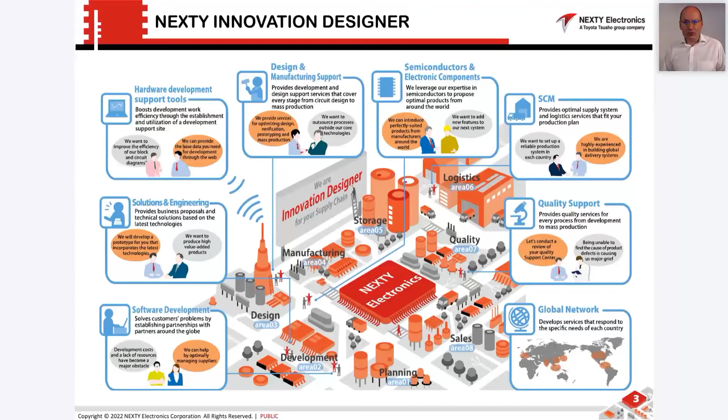And I'm a little bit of a lucky guy, because I can cherry pick a little bit what is really cool, what is very hot, and sometimes what is not hot now but could become very hot in the future. And I'm very carefully taking care not only about the technology, but as well about the business model behind it, because it needs to be sustainable, as all our company's contribution is to the world. We are looking for the long run.

Now, only a short view of our semiconductor products. So I don't want to sell you anything out of that. We are basically very, very strong with our group companies. We are keeping a very, very good stock of them and keeping our operations running.

Now, to give it a bigger picture, what are Toyota and the Toyota Group companies doing, and what is basically our contribution to that? So we are following the Toyota Environmental Challenge 2050, where we have to go to zero CO2. So this is our very clear target, and CO2 is our enemy. So this is basically what we are focusing on. Every tool and every solution which helps to achieve this target is highly welcome.

And this is the reason as well why we are not thinking only in one propulsion or one drivetrain technology, because, and I will come later to that, in many markets, or for different people, we have to have different solutions. So we cannot have one technology that solves all.

So for that purpose, we have the mixture between the different propulsion systems, which in the sum, plus everything which is coming from the manufacturing, from the water usage, and the environmental effects, but we also have a very strong focus on what happens in society with our system, how we contribute to mobility overall.

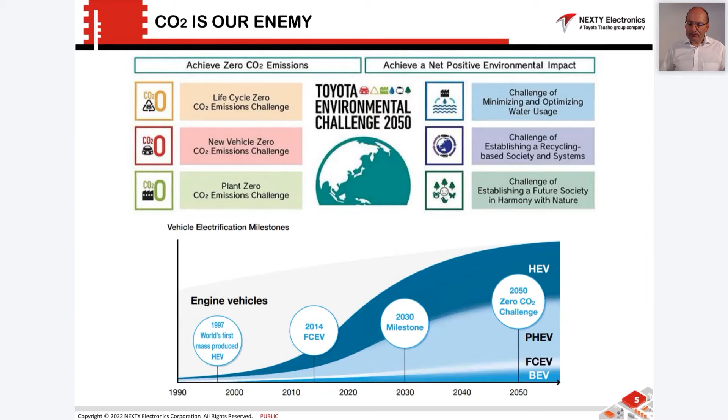So if we are thinking of different electrification concepts, they all fit into the bigger picture where we think somehow everything is a hybrid. As you know, this year we will have the 25 years anniversary of the first hybrid vehicle. But everything follows the same concept, that we are very modular and we can exchange all the parts around it. So we have the full hybrid where the ICE is still in.

We have the battery electric, where Toyota Motor presented a very nice product this year, and there is a lot in the pipeline we are working on. We have the plug-in hybrid, and on the right bottom you have the fuel cell hybrid. We are always hybrid. There's always a battery inside. So for us, it is not a competition between the battery system and the hybrid system.

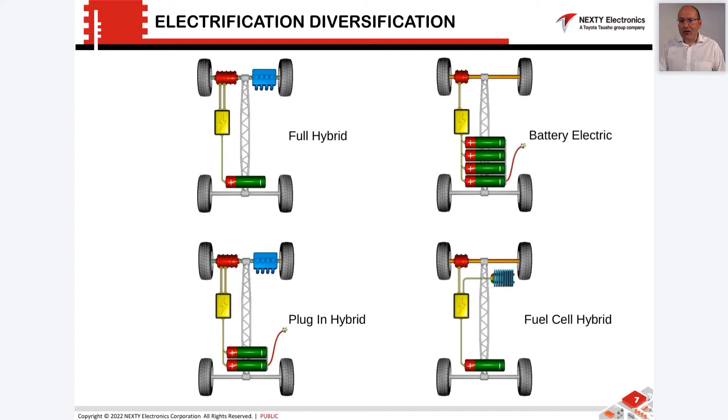Then if you think about how long Toyota Motor has been working on hydrogen, it's a really long history. And this is continuous work and a continuous fight to really place the product in production. It was always the target to bring it to the people. Even though we had some painful developments behind us, we continuously worked on it. And we from NEXTY contributed as well from the electronics and semiconductor side.

Now, the jump between the first generation Mirai and the second generation Mirai was really significant and vast.

So this change and this step was really a game changer, because now we not only have the production capability started from the first generation and a huge fleet experience, the good and the bad fleet experience, and on the other hand, we could as well invest a lot of money in the efficiency of this product and the durability of the product, so it becomes a very cool product overall, which I'm always surprised to see if I see benchmark data where we are.

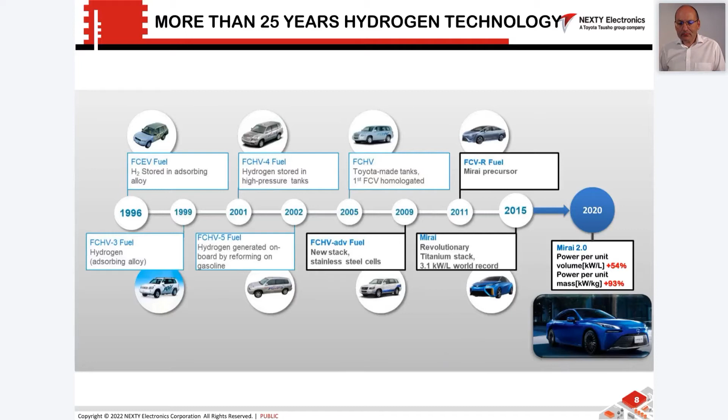So the idea of the module started with the thinking, okay, how we can scale this product, how to open the technology as well to other players in the market, without hiding the technology. We wanted to always share the technology. So we were always very focused on society support and positive impact.

So the thinking was, okay, the Mirai, it's a beautiful car, very nicely done. We have separated all the components because of weight distribution or noise emissions and that kind of stuff. So in the passenger car, you think completely differently how the module needs to be placed or created, because for the module, for us, it's not only the stack. We are thinking the module itself is a combined system, which is perfectly adjusted to itself, and follows a very efficient operation.

So we took now the Mirai 2 product and basically used the same components. There is no difference between the Mirai 2 and the module products. As they are distributed in the vehicle, each of those components gets repackaged. So not only physically put together, but as well electrically connected on the hydrogen gas path. We connected as well the air path, and the system is packaged in two different shapes and sizes.

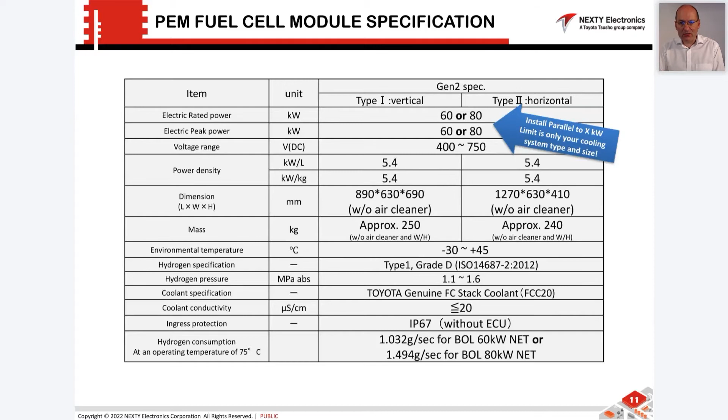It's a really heavy frame because it also gives you the possibility to hang it from the side to some frame, or you can put it somewhere, you can hang it up, and it gives you a lot of, let's say, possibilities for the mounting. In terms of integration, you see the high voltage, everything connected to it. You see all the pipes, wires, everything is inside.

It comes as well with the high voltage DC-DC converter already, and it is already inside this frame, whereas with some of the fuel cell modules you can get on the market, you need to organize yourself a third source for it. Here it is inside, already integrated. The diagnostic system is connected to it. All the safety stuff is in.

So we have designed it so that it fulfills the ISO 26262. Everything is documented. We are interacting with the vehicle. So it's not like it can work for itself in that sense. We specified what is needed, what sensor information we need from the hydrogen leakage and so on. And then we are, let's say, reacting accordingly. So this is very well designed in terms of safety.

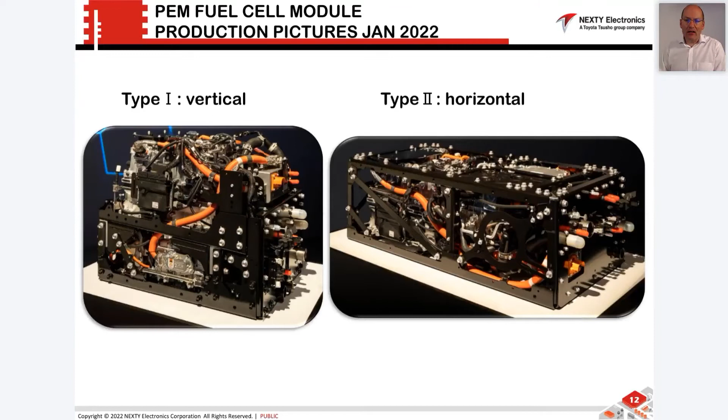So we are very proud that we can really offer this outside of the Toyota Group as well. So I think the integration by Paul Nutzfahrzeuge with Pepper Motion is a brilliant match showing how a completely different product can be built out of it with our help and support.

And then we have other things which are quite interesting to know: we have identified beyond the module that we have a fantastic source for every kind of high pressure device, and we have the complete component sets available in-house, and we are very open to share this. So nearly everything you can have, but it has very unique strong points.

Which is very interesting to know for very specific niches, where you have to have a very high cycle of refillings, beyond the standardized one. So we are outperforming the typical standards by multiple times in refilling. Or you have a certain quality or a certain temperature treatment on the connectors, that kind of stuff, which is not the standard. So we made this product basically for a very, very long useful life.

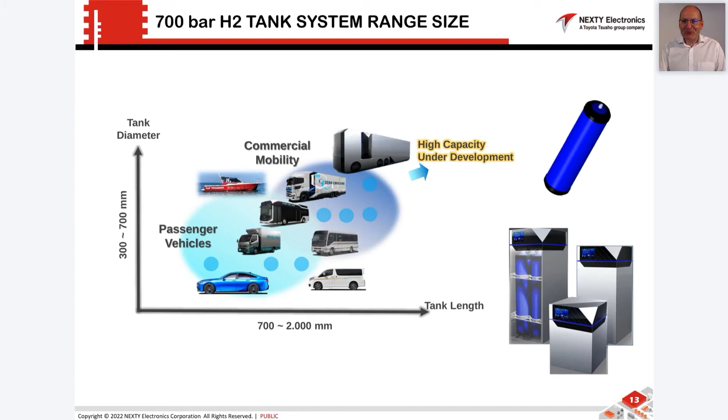And sometimes we discovered it would make sense for a firefighter truck or whatsoever, where, let's say, this specific product specification perfectly fits in. In the mass market we could provide it, but as of now, I don't know if somebody knows that we can supply it. So probably after this workshop we will have more business opportunity for that, but so far probably nobody knows it. And it has a certain variety: you can identify, let's say, the specific diameters, and we basically make it longer.

So this is how, let's say, the volume or the kilograms we put in will change. What's probably also new for you, if you see this table, it is definitely outside of the Mirai storage capacity. So we are doing other things as well, for completely different applications. We use the same tools, the same processes, the same quality to make tanks for completely different applications.

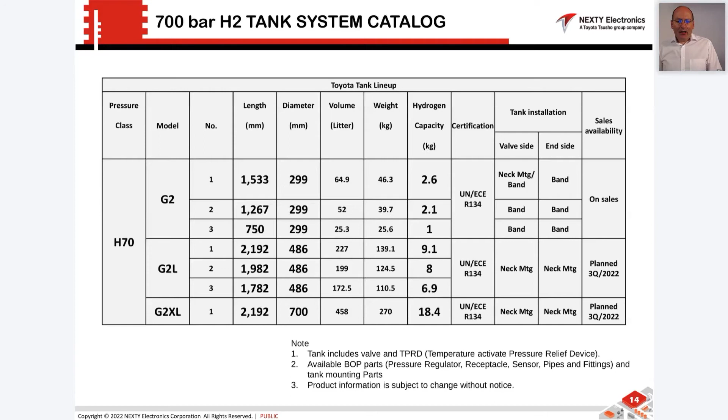And I wanted to show you a completely different perspective, which, as innovation manager, I discover more and more is something I don't hear that much about: the digital connection between the asset as a vehicle, or the tank of the vehicle, the usage, the track you need to ride, the payload combination, the fuel station connection, and then for some areas, the fuel station with the hydrogen production is to a certain level closed.

But if you go for a fleet operation, you cannot compensate it with a huge fuel station. You cannot compensate it with a huge buffer, because it adds a lot of cost to keep this hydrogen somewhere. You need to store it, you need to cool it, you need to transport it, and everything you add on this buffer creates a higher hydrogen price for the end customer.

And what I discovered is that, as you know, for the just-in-time, just-in-sequence thinking and philosophy, we have a lot of software solutions. And I turned it so that we can now estimate the vehicle usage as a digital twin. So far it was always focused on diesel vehicles, but now we can very accurately forecast for battery electric or hybrid vehicles what happens with the fuel consumption, the usage, the track you need to go on, in real time. And on the other hand, where to charge and what the charging sequence is.

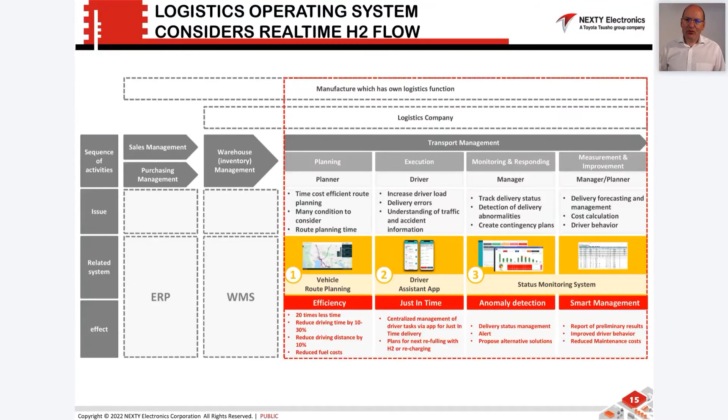Probably the hubs are not sitting in a proper position, even if for diesel it was a cool and nice location, but now you need to turn the complete world around, the energy flows. And I think as energy becomes even more expensive, we will have more turning towards the cheaper energy sources and designs like this. So I wanted to give you a glimpse as well of what we are working on.

And this is, let's say, a real-time system. So you have to really act on the current situation on the road, because of traffic jams or whatsoever. So you can go into very, very low details using this fleet operating system that we have in Southeast Asia, already running with more than 150,000 vehicles. We are using it there for different logistics or service providers, which are connected to our system. For me, it was as well very new to understand how big these platforms are and what kind of experience we can gain out of it, let's say, for the hydrogen world.

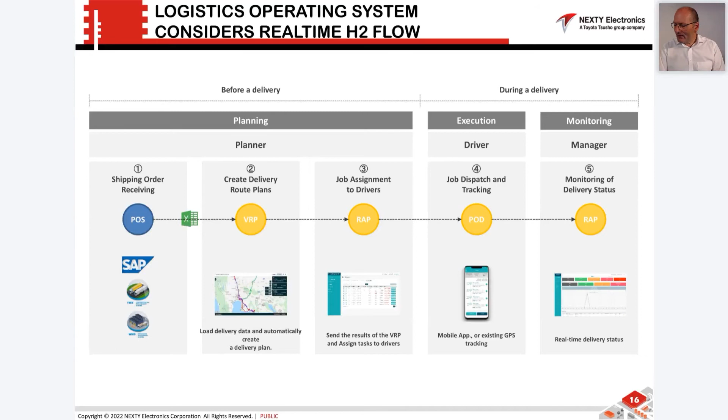So here I slowly wanted to stop explaining what we are doing and how we are contributing to it. I hope that you have a lot of questions for me, which I would be very, very happy to answer. There you go.